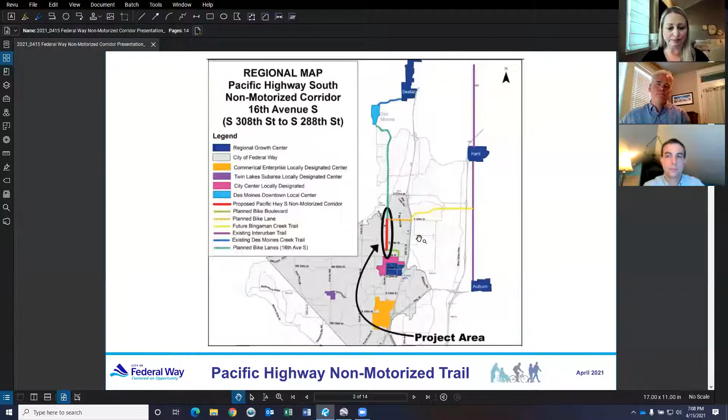All right, next slide. So this one here kind of shows the overall alignment, and Sean's going to get into this in more detail, but you can see here it starts at South 308th Street near the Federal Way High School, and then it will continue up to South 288th.

One of the questions that I always hear is, this isn't on Pac Highway, why are you calling it the Pac Highway non-motorized trail? This project is the #1 project in the city's bike and ped plan and has been for a long time. And it's always been the plan to have this parallel route in order to get bicyclists and pedestrians away from Pac Highway.

That road has some of the highest traffic volumes in the city, and so it doesn't necessarily have a high comfort level for non-motorized users. So this parallel route is the preferred alternative for non-motorized users.

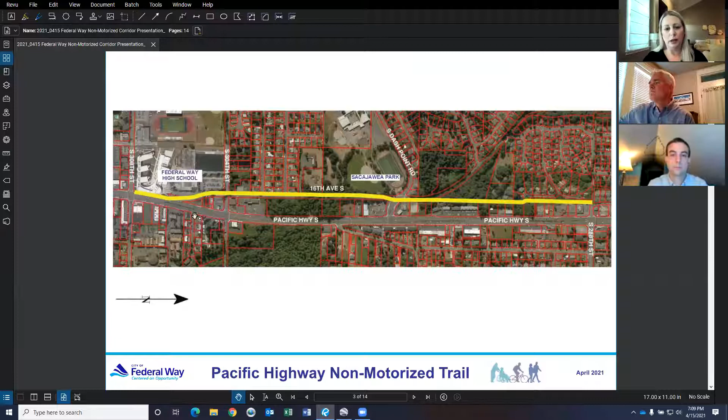Next slide, please. As far as the project budget and schedule, we normally break projects down into 3 phases: design, right-of-way, and construction. The design of the project is currently underway, has an overall budget of $700,000, a large portion of which has been funded with a federal grant.

We've been working on the design since last year and anticipate that we'll probably keep working on that through next year for parts of it.

For right-of-way, that is anticipated to cost around $840,000. Again, we have a federal grant that funds the majority of that. Right-of-way, for us, includes both purchase of property and also temporary construction easements if we need to access part of a parcel during construction. So we will start that process of working with property owners if we need to acquire any property rights or property.

We will start that later this year, probably in the fall, and that will continue on into next year. And then for construction, that's estimated at 5.1 million, and that includes the actual construction costs as well as construction engineering and construction management services.

We did recently receive a 1.835 million federal grant for what we're calling phase 1 of the project. And then there will be a funding cycle that opens up next year for additional federal grants, and we plan to apply for grants then. It's the same process that we did where we received our design and right-of-way grants. So we feel like we have a very high probability of receiving funding for construction as well.

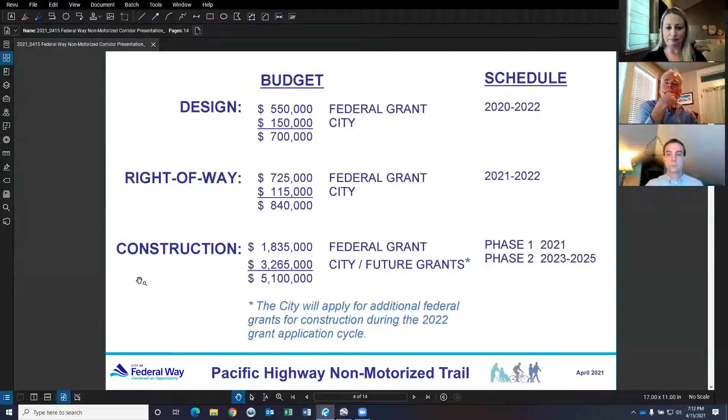Okay, so now I'm going to kick it over to Sean, and he's going to go through some of this in a little bit more specifics. Yeah, thank you, Christine. And I did want to pile on to the funding part, where there is this federal funding in there, and it kind of hems the design team and the city in what they can do with the money and what sort of betterments they can and can't do. So that really is one of the main guiding factors in the design here.

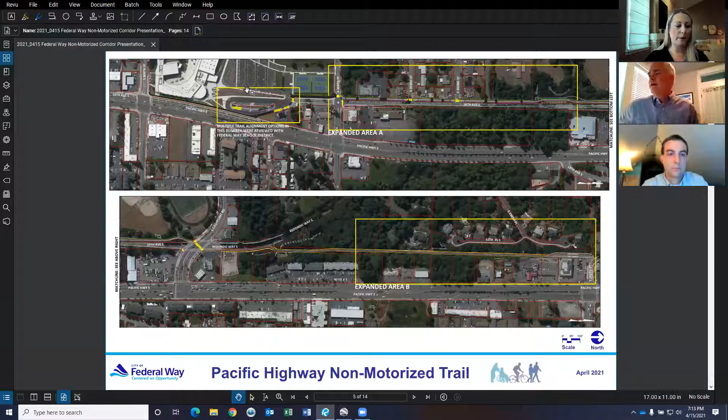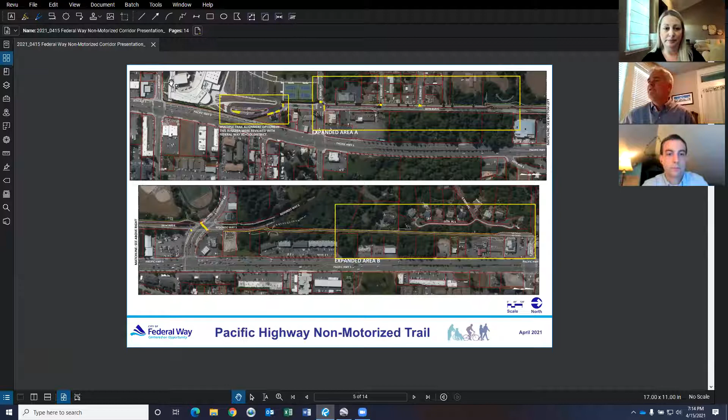Sure. So here we have a little more zoomed in, and I can zoom in and out of this throughout the presentation so you can see it better. This is essentially the entire route. It's broken into an upper view and a lower view, with a match line over here. So this line right here connects over to this line. We just did that so it all fits on one page. And then I have a couple other slides that will be more zoomed in onto these areas. But I just wanted to at least walk through using this.

You can see we're starting down here on 308th, just at the corner of the high school. There's already a sidewalk out there, and we're going to be widening that to the standard trail width. And I should back up. So what we're doing is putting in a non-motorized trail, and a typical trail width is 10 to 12 feet wide, and they usually have a shy distance on either side, like a shoulder, like a 2-foot wide shoulder or a landscaping strip or something like that.

And it's, for the most part, going to be asphalt pavement. Where it's next to an existing concrete sidewalk, for instance, next to the high school here, that's concrete sidewalk, not asphalt. So when we widen that concrete sidewalk, we're going to widen it with concrete. You can imagine it would look a little silly if it was asphalt right next to the existing concrete sidewalk. So anyways, there's this sidewalk already next to the high school. It runs along Pac Highway, and we're going to be widening that. There's some light poles out here that will have to get adjusted because they're going to be in the way of the new widened trail.

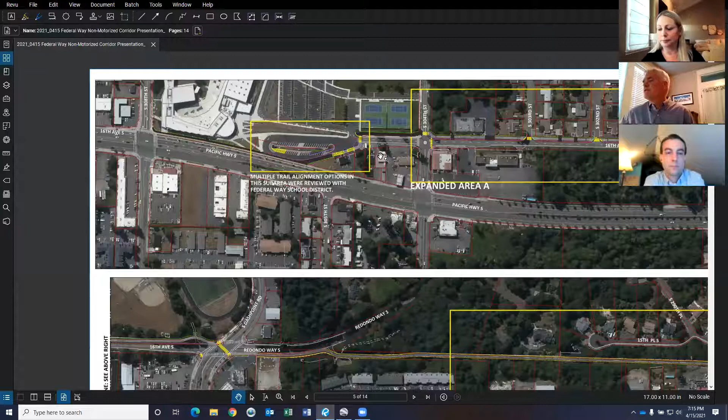As we cross, there were some different options we looked at for how to cross over from here over to 16th. I'll get into a slide that shows a little more about that. But there's this parking lot area, and we're going through next to a Jiffy Lube down here and some other commercial retail properties. Hopefully you can see it crosses 16th here. And then we stay on this side, the west side of 16th, all the way down to Dash Point.

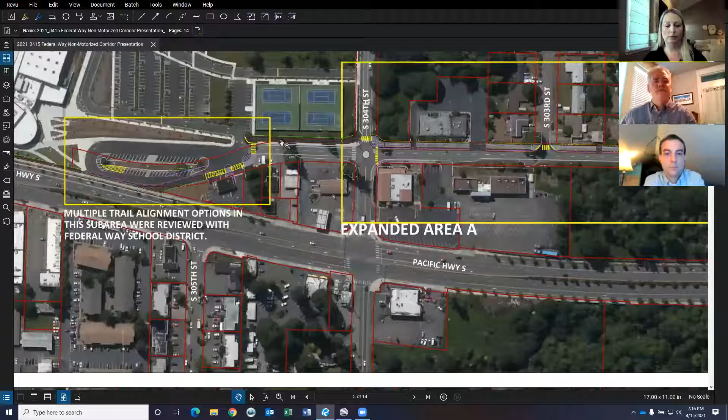Same situation here that we just talked about. There's a sidewalk out there right now. We're going to be glomming onto that sidewalk and widening it to 10-foot width. Right now, that sidewalk is 5 or 6 feet wide. We're going to be crossing 304th, and this trail is going to follow essentially the edge of the public right-of-way. It's going to go right up next to all these. There's some fencing out here along these properties, and the trail is going to go right up to that.

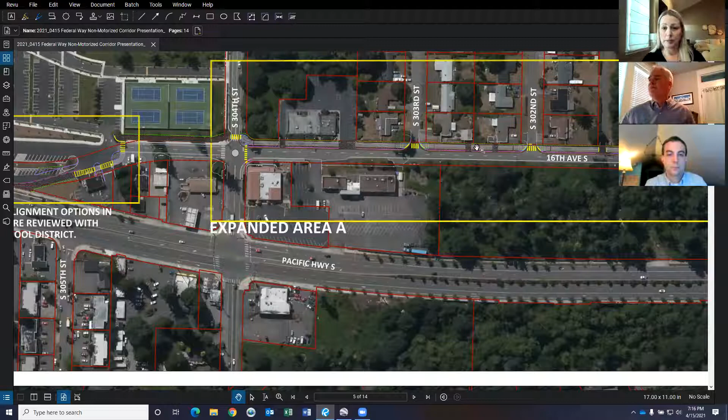And there, we have some typical sections I'll show you, but it's not like the asphalt of this trail is going to go right up to that fence.

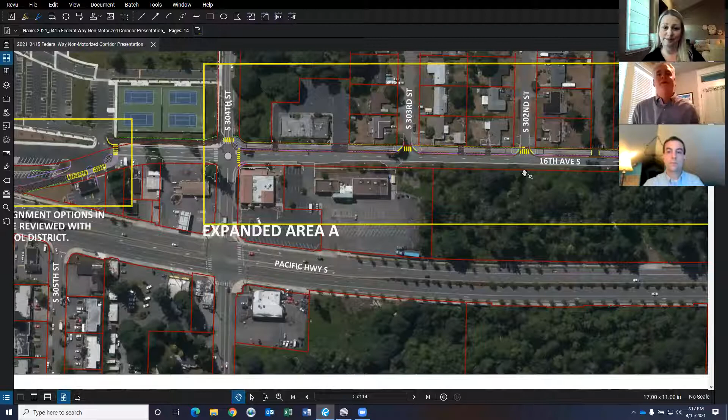There's a 4-foot landscape buffer between the private property fence and the trail. Where you cross streets, there are treatments that you put onto these. Typically, we'll put a bollard so that cars don't drive up onto this trail because it's wide, 10 feet wide, and a car could easily accidentally or purposefully go up into that trail. We do have the ADA warning strips where we cross streets.

Now we're a little further north, and this over here is Sacagawea Park. There's some on-street parking there today, and we're going to maintain that, so that's why you see this little bulb out for the trail here.

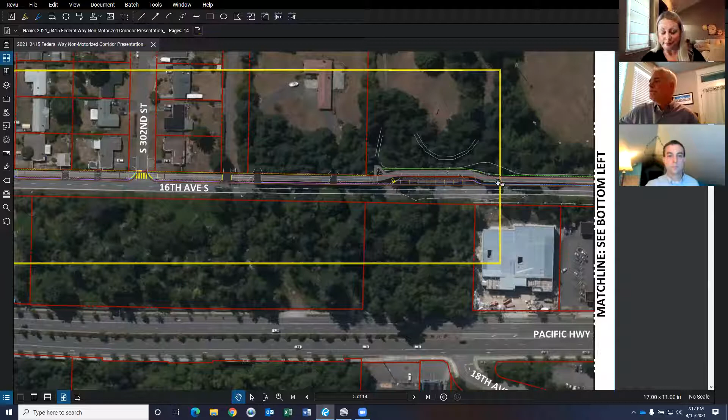Continuing to follow 16th, we're right next to Sacagawea Park. We bulb out right here. There's a lot of utility infrastructure here we're trying to save, plus it gives kind of a nice urban landscaping appeal there. Aaron will get into that more.

Right here you can see where the crossing is going to be a diagonal crossing, which is a little unique. The design team had to prepare a traffic study. Dash Point Road is actually SR 509, a state route, so we have to get approvals from WashDOT in order to do something like this. We had to go through a traffic study and show that this isn't going to make an already very congested intersection worse.

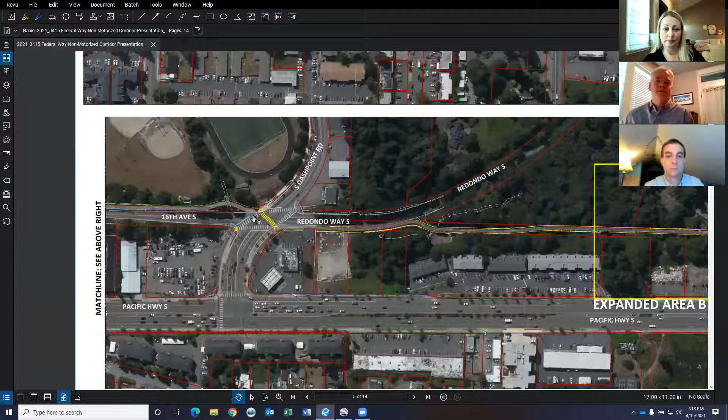In fact, it makes it a little better because fewer people are using these long crossings, more people are using this short crossing, which can speed up the cycle time. It's actually safer too because there's more sight distance for cars turning left and right.

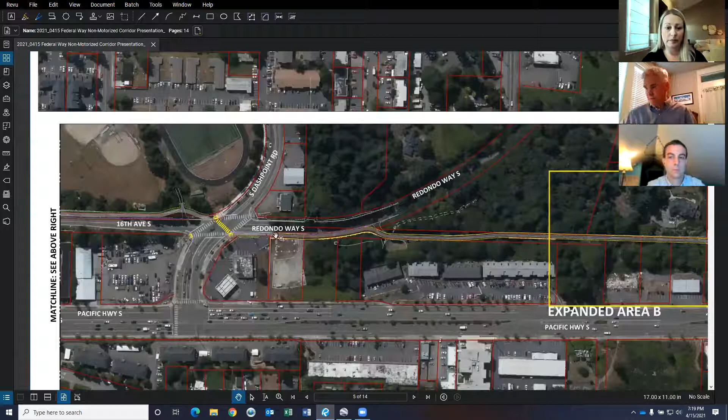This is, I think, a Shell gas station right here. The trail is running along Redondo Way at this point, and it's going to just follow the profile of Redondo Way. That roadway has a steep grade going downhill, and the trail is going to follow that.

Starting right about here, you can see it branches away from Redondo Way. There's actually a utility maintenance access spot here. You can't see it with the line work on, but if it was turned off, you'd see a swath of trees missing through this entire area for this utility maintenance path. There are a lot of utilities back here—Lakehaven Water, sewer, telecoms, fiber optics, Puget Sound Energy gas lines, power lines. We're trying to thread the needle and minimize the impacts to those utilities as much as we can.

There will be some utility impacts, but we're really trying to minimize that. You can see right here the trail has this little slight jog, and that's because we're trying to miss some of the large transmission utility poles that are out there.

Another thing to note: for the most part, the ADA standard is that if the trail is following a roadway, adjacent to a road, the trail or sidewalk can just follow that roadway grade. But through this wooded area, we're no longer along a roadway, so the rest of this trail from Redondo Way, where it branches off, all the way to the north end, has to meet ADA requirements.

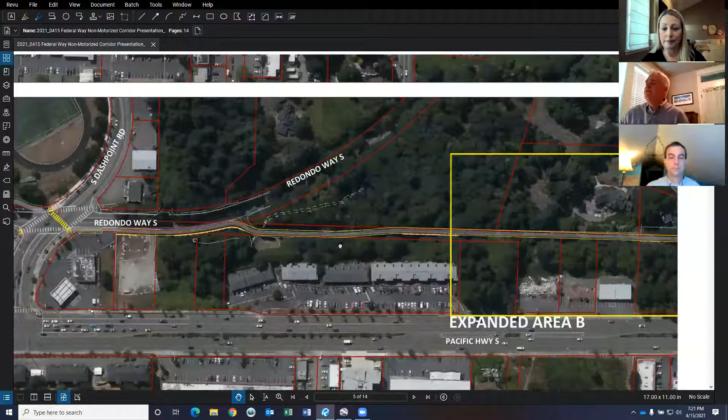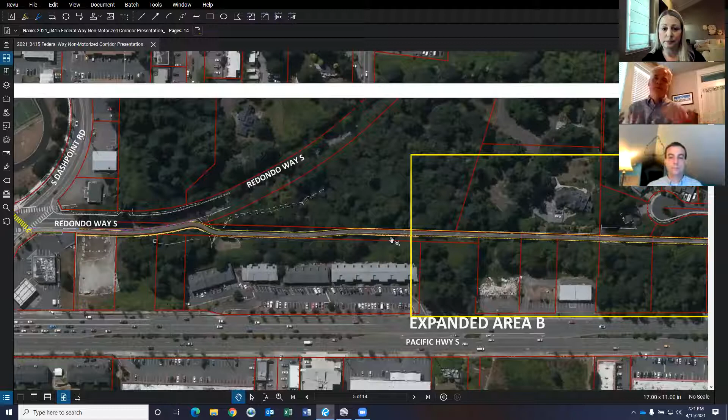For a slope, we can't go steeper than 5%. Thankfully, this whole area through here is at about a 5% slope. It maxes out over here, but there's a little bit of a retaining wall that we're going to need right here, cut into the hillside a little bit. It's likely going to be a rockery style retaining wall, about 150 feet long, just so that we can maintain the ADA grades.

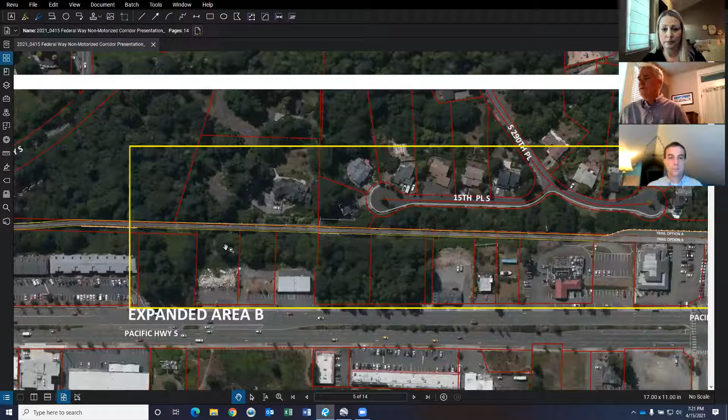We continue this way, and the path starts right here where my hand is to cut through private property. It's all private properties that have a frontage with Pacific Highway South. Right now, the way we've got it designed, we don't think we're going to need any property on this side.

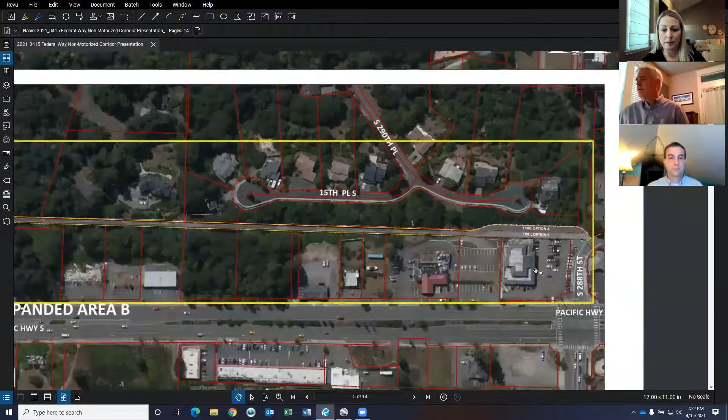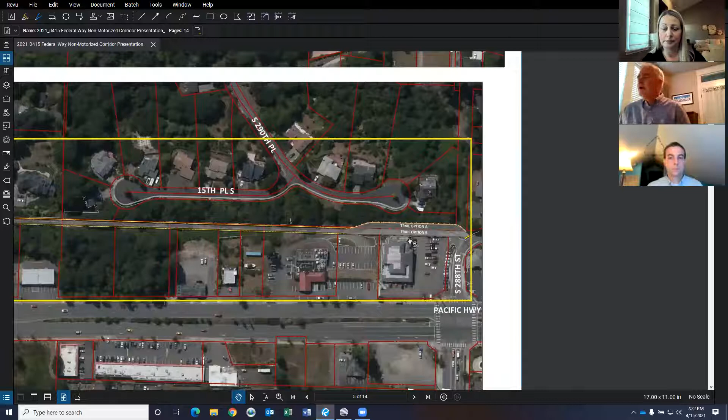And if I keep going up here, here is a commercial building. It's got some, I think there's an insurance, maybe a nail salon, there's some retail or something in there. And early on, we were looking at some options, a couple options right here, which you can kind of see, and we'll zoom into this a little bit more later.

I did want to mention that, especially through this wooded area, it's dark. So we're going to put pedestrian scale lighting through here, so it will be lit at night, and people will feel comfortable walking through here. There's also talk about potentially having some of the safe city cameras through here. The idea is we want to make this a safe destination for people to feel safe in walking through here.

Unless you think I missed something there, Christine, I'm going to go to the next slide. Yeah, no, that was very thorough.

Okay, here's one of the slides I wanted to show everybody. We're kind of zoomed in near the Federal Way High School here, and we looked at a few different options. There's this question of, okay, if we have the trail over here on Pac Highway, and the trail over here by these tennis courts, how do we get from here to there?

We looked at a few options here. One, in yellow, kind of cuts through this courtyard area and uses this sidewalk and just runs into this over here, the sidewalk over here. The school had some very legitimate concerns here because the bus is using this, putting trail users next to the bus loading zone.

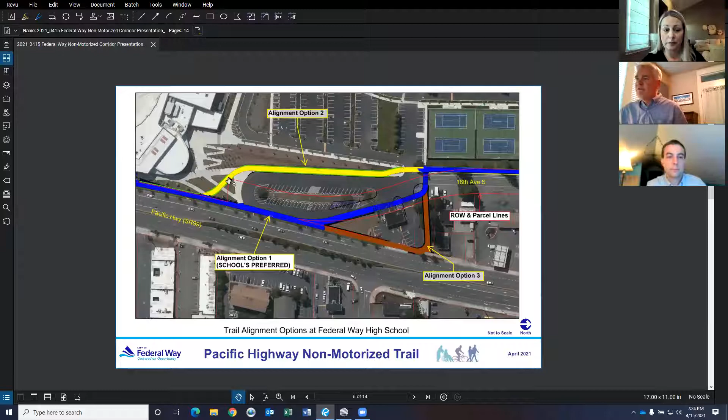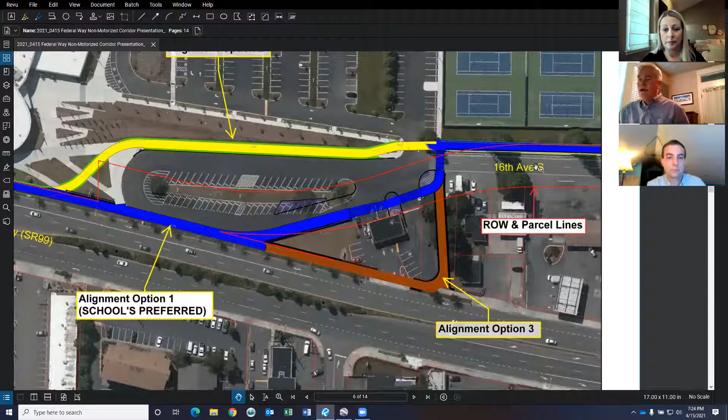I don't know if you can see it on your screen, but you can see a red line. Those two red lines there represent technically the public right of way, which I gather used to be an old alignment of 16th Avenue at some point.

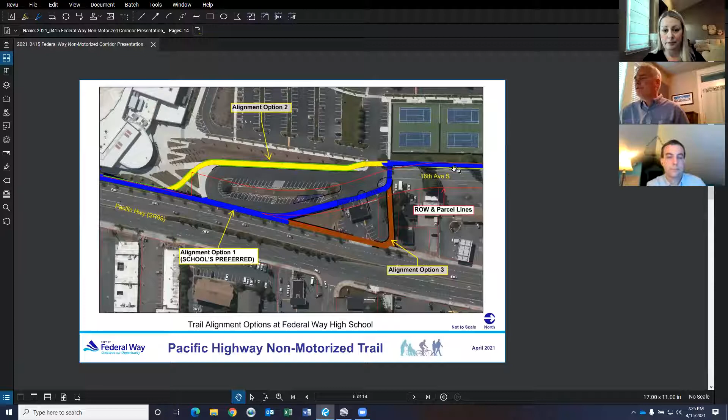And so we did hear back from the school, and their preferred option is this blue one. They had legitimate concerns about putting it up here, so we're moving ahead with this blue alignment here. Let's go to the next slide.

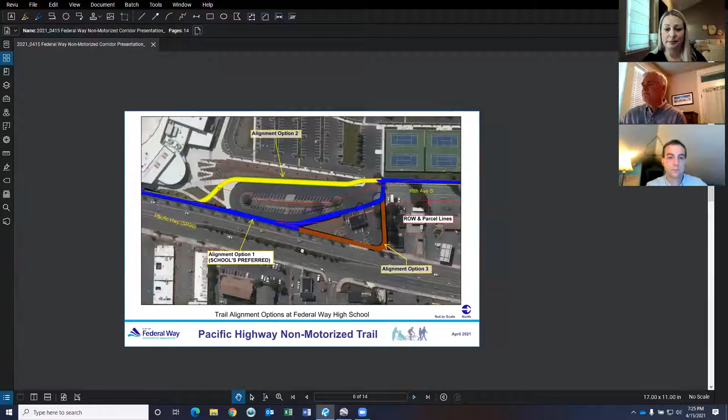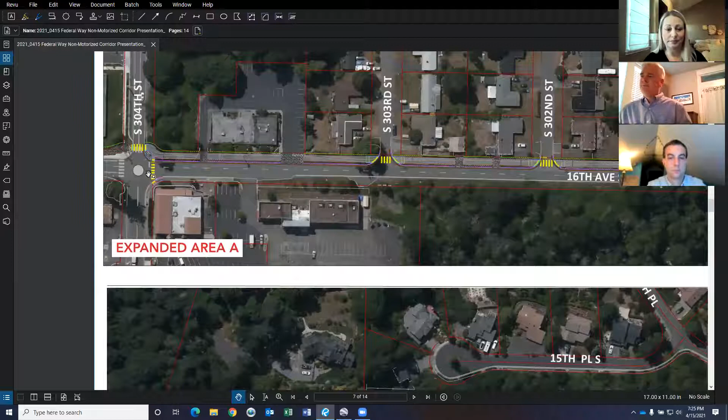Okay, now we've got a couple more of these views where I'm a little more zoomed in. You can see here at 304th there is the notion of putting a little traffic circle here to help with traffic calming. Apparently along 304th there can be quite some speedy traffic, and this could be a traffic calming measure. So we're going through and making sure that if we put a traffic circle here, the school buses that use this route can get around it okay. We're looking at all that too.

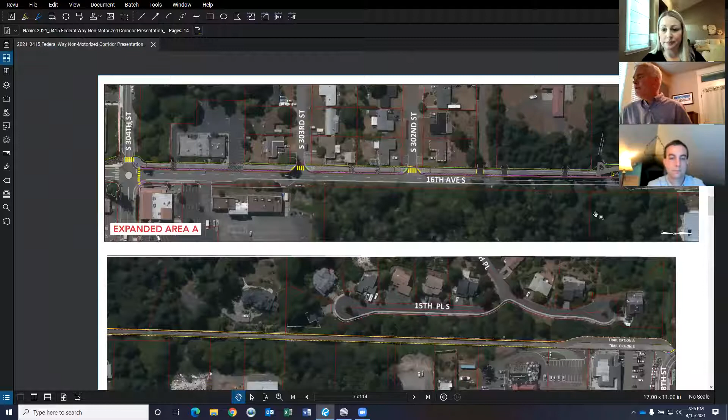So I kind of talked about this whole area. I'll zoom into here a little more. Now I'm back at the very north end at 288. We were looking at two options here, trail option A and B. Trail option A sort of swings out and goes over this really steep hillside here. This parking lot, I want to say, is 20, 30 feet above this house down here. So it's a really steep drop off.

Because of that really steep drop off, we had our geotechnical and structural engineers take a look at this and come up with some preliminary options of how you would support a trail. One option is to have a big retaining wall there, but it gets costly because that puts a lot of load on the hillside, and you have to deal with potentially lightweight fill, which gets very expensive. Another option was to treat this almost like a little bridge, with columns going into the hillside along the center of the trail, holding that up.

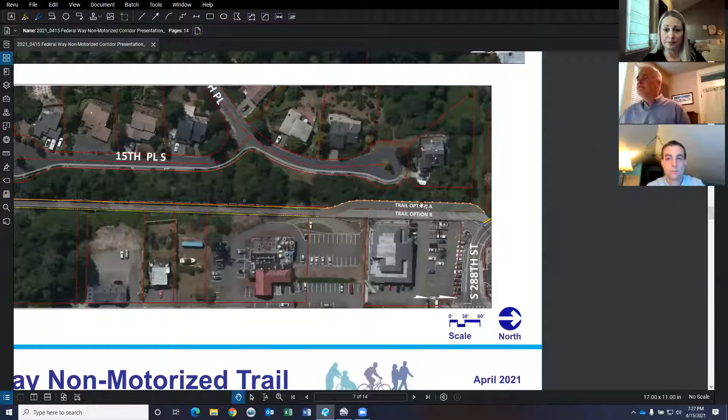And again, you can imagine the cost associated with that gets very high. So we went back to looking at, well, what if we just went along this parking lot? If we acquired this western 20 feet of this parking lot and just had the trail go along there. We're starting the conversations with this property owner and talking about what impacts that may have on their parking, their trash services, and all that kind of stuff. But right now it's looking like it's going to be far less expensive to just go with trail option B because of those structural and geotechnical issues I mentioned.

There's a ton of utilities right in this little corner that we're starting to coordinate with the various utility owners about how we're going to relocate. And of course, we're doing whatever we can—if there's solutions for us to alter a design to help those utility companies, we work through that. But sometimes there's just no other option other than moving a utility pole.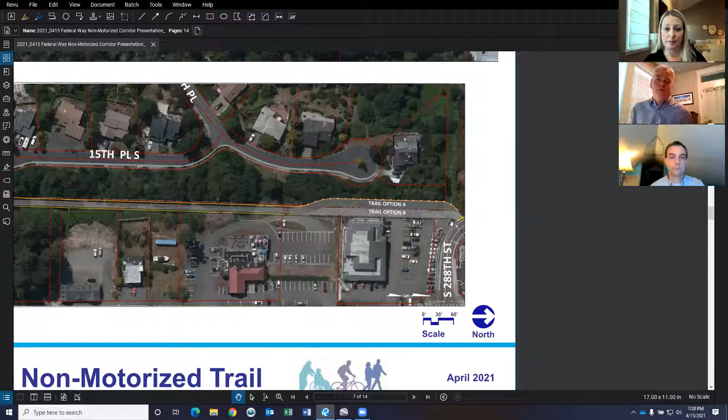All right, I'm going to go to the next slide.

Okay, so I'm going to go through some typical sections, like a cross section. And Aaron can chime in here too on some of these. What you're looking at here would be a typical cross section along 16th Avenue. We call it a south section, between 304th and Dash Point. So you have the existing—

There's typically right now a ditch out here and an existing 4-foot sidewalk that kind of meanders through this area. And then this right-of-way line that you see here essentially represents the fence line that's out there today. So the idea is we're going to stay entirely within the right-of-way and not even need a temporary construction easement over here. But you can see there's a 4-foot landscape buffer over here, a 12-foot trail, and then a landscape buffer here, which will vary 4 to 6 feet. And then here's the existing road.

And we're still trying to work through what kind of drainage impacts this will have. Typically, whenever you put this much new impervious surface down, you have to treat that water from a detention standpoint. And we have to mimic essentially a forested condition—that's the Department of Ecology requirement. So we're trying to figure out, does this become like a low swale? Are we going to have some underground drainage systems with catch basins and underground pipe to pick it all up and convey it and detain it somehow? So we're still working through that.

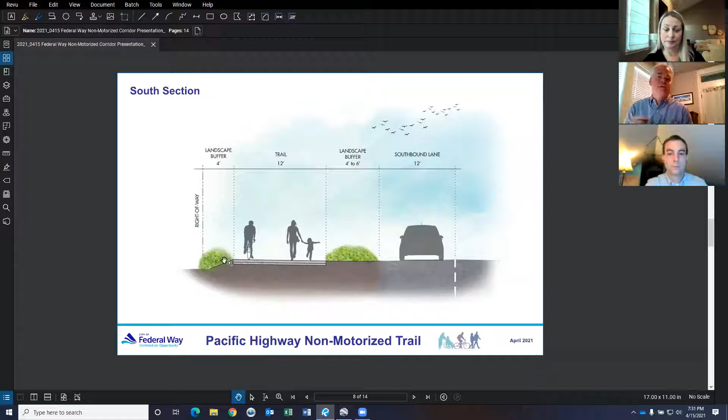Here's this area down by Dash Point. There's Sacajawea Park here. And Aaron, I'll let you chime in, but Aaron's thought about some landscape and hardscape at some spots. Yeah, thanks, Sean.

So I think this area is a real pivotal point in the whole trail corridor because it's the intersection of Dash Point Road, but it's also really at some of these gateway entrances to the park and the school there. So in order to meander the trail around some utilities, it also serves as a really good spot as a middle resting area or an area to identify the trail that goes further to the north and the south. If you were perhaps walking or riding your bike along Dash Point Road, you'd be able to identify and notice that this is a significant trail that you could connect to. So we're planning on some various amenities here to help enhance that experience as either a resting spot or a meeting spot to meet someone to go along the trail, and to enhance the experience as you might enter the park or school if you're headed that direction too.

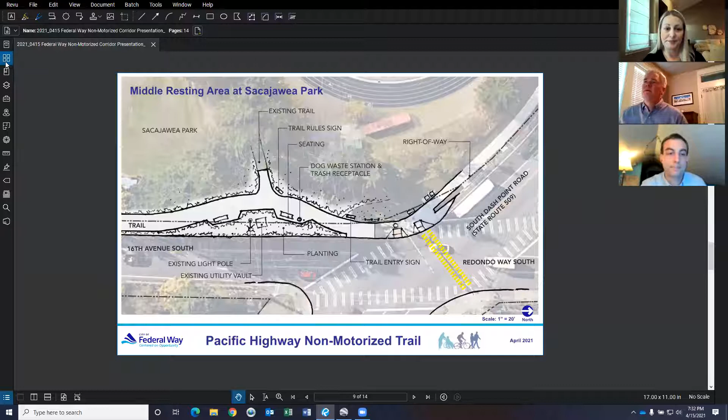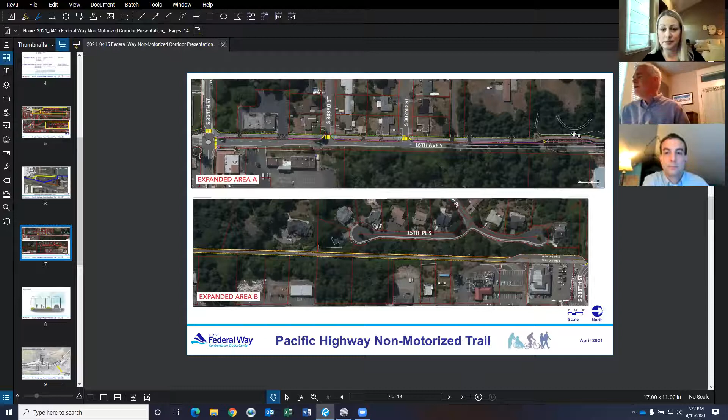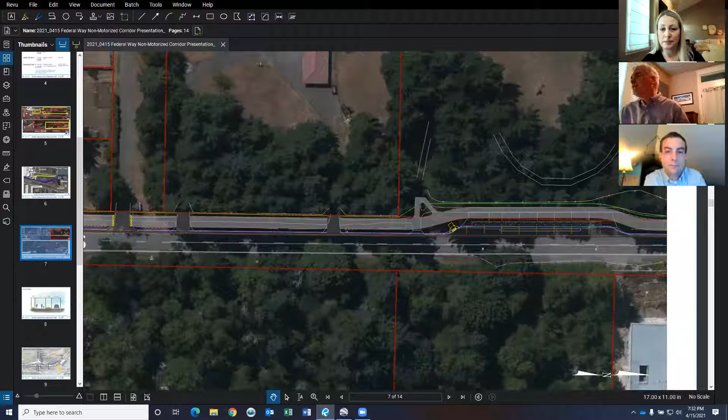Speaking of that, I forgot to mention, I'm going to go back to this slide. So there are a couple connection spots that we're having directly into Sacajawea Park. One was what we were just looking at right there at Dash Point Road. And the other one is sort of on the south side of Sacajawea Park. You can see there's going to be a nice new connection here, and it's going to connect to some trails that are already throughout this area. From what I understand, the Parks Department is thrilled about that—it's a nice, safe way to get the kids in and out of the park.

Sean, do you want to maybe explain the parking?

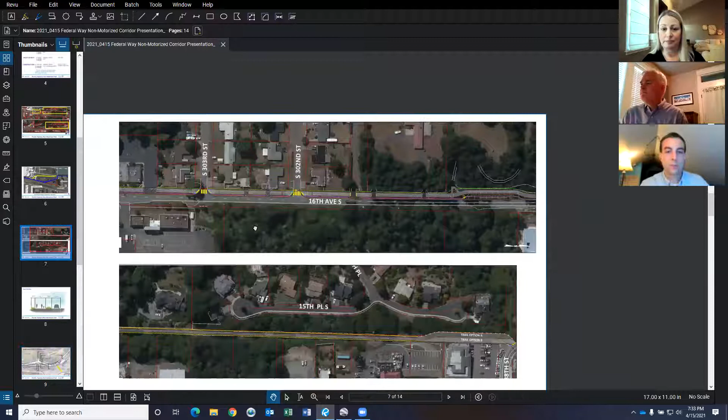How we're changing it, but not significantly. There's some parking out there. You can kind of see this light white line here—that's the existing curb line. You can see there's some stalls out there right now, and we're wanting to mimic that.

However, right now they have the option of pulling in off of the roadway totally, and there's a raised island right there, that gray line. So that raised island goes away, and it's more of a typical on-street parking where we bulb the curb out enough so you can safely park cars and get in and out of that area.

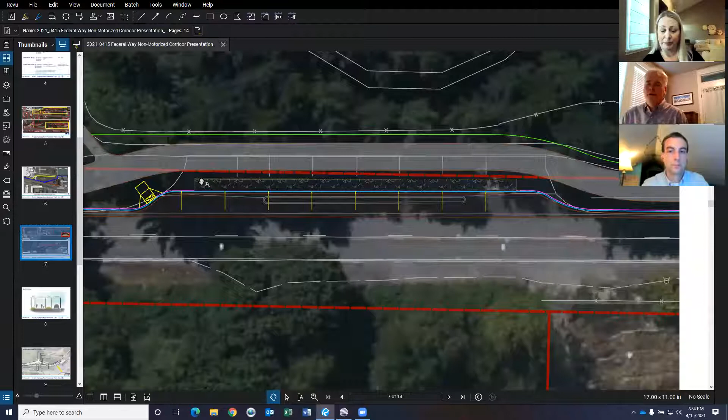Parallel parking, correct. And there'll be a little concrete patch here so that when someone on the passenger side is getting out, they're not stepping onto wet grass or anything. It's not shown in this drawing, but we'll have various connections over to the trail so people don't have to walk through mud or wet grass.

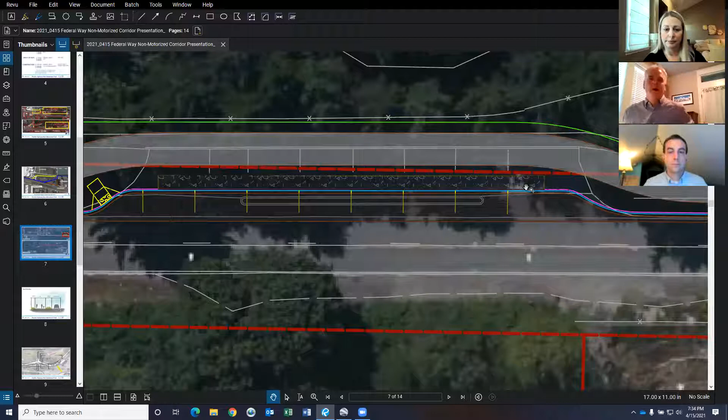All right, let me close that. So that's the section we talked about on 16th. Here's that spot near Dash Point.

Here's a typical section through the north half in that wooded area. You can see it's a 10-foot trail, with 2-foot shoulders on either side. Sometimes the hillside out there today is much steeper, and we just don't have the room to cut the hillside back at a 2-to-1 slope—that would chase it all the way back to the highway.

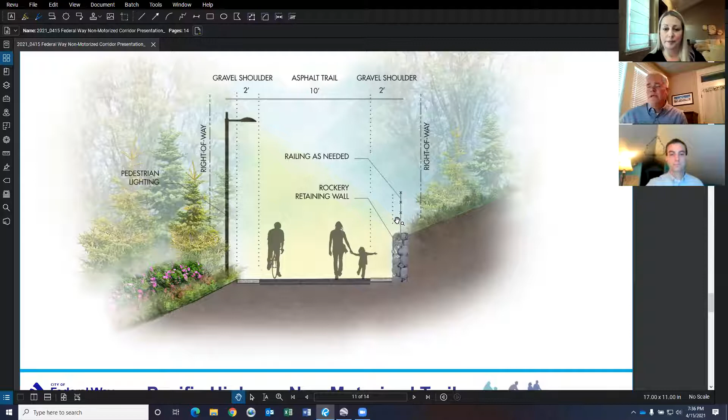So there's some locations where we have to put a bit of a retaining wall, and I have a typical section of what that would look like. The scale of this wall is anywhere from 3 to 5 feet high—it's not huge. Still, anytime you have something over 3 or 4 feet, you have to provide some fall protection in case anyone up here might fall down. So there'll be some fall protection, probably a vinyl coated chain link fence.

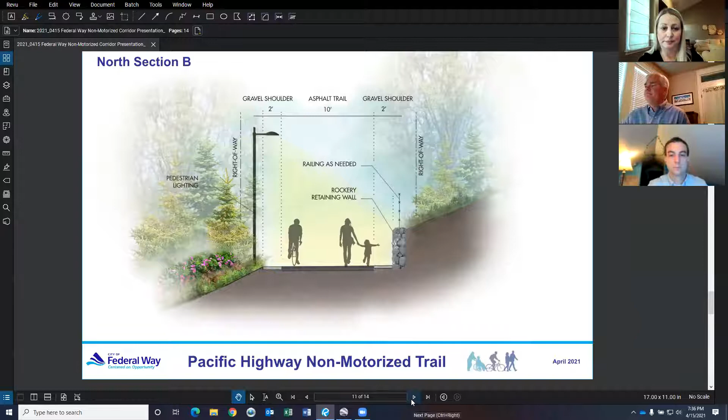And then here you can see the pedestrian scale lighting. We're still trying to figure out exactly what this light pole standard is, but there will be some lights along the trail here. I think I have another slide.

Here's a zoomed in picture at the very north end where it connects into 288. We have trail option B and trail option A, and right now we're taking the approach that trail option B is the preferred route—it's just more feasible from a cost standpoint.

You can see these black lines with the double dash are the existing right-of-way. If we went with option A, that's private property there, and that would have to be purchased. But we're thinking trail option B would stay totally within this existing right-of-way here. We're still looking at title reports of the various properties we're going through to figure out the exact property line, and there is apparently a 20-foot wide existing utility easement there at the very least.

So we're working through that. And Aaron, I don't know if you wanted to mention anything from a landscaping standpoint.

This is a terminus, and because of the grade change from Pacific Highway, we really wanted to enhance the entry into the trail at this point, so it would be visible from different vantage points, and provide potential areas for meeting someone if you're going to jog, walk, or bike with someone along this trail—with some seating, potential signage, and other amenities to really enhance that terminus or entry point, as if you went south.

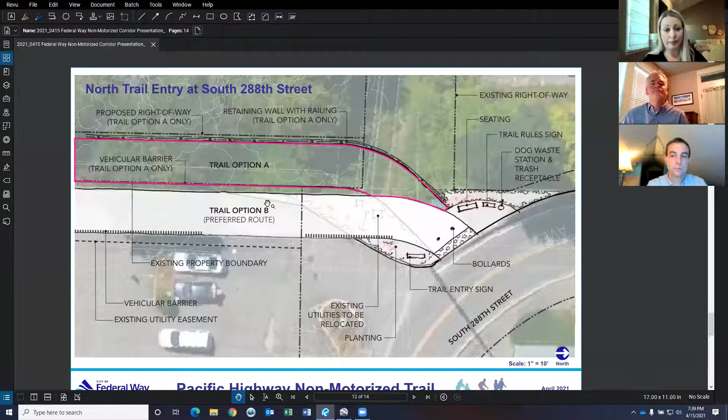I think I actually have a typical section of that. Yep, so that's right here. We were looking at trail option A where it went outside onto this steep slope, and this diagram is a little deceiving in that the slope is probably realistically more like this, or steeper.

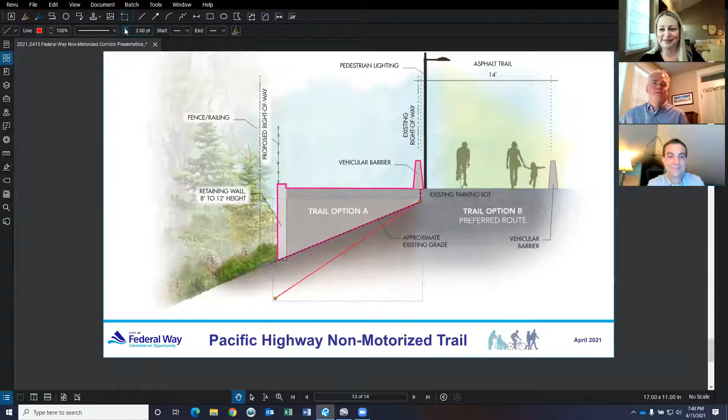So again, the plan is trail option B where it's up on this existing parking lot. The barrier, if we were to build a new wall, let me draw that and see how good my drawing skills are, but you can see the right-of-way line right there.

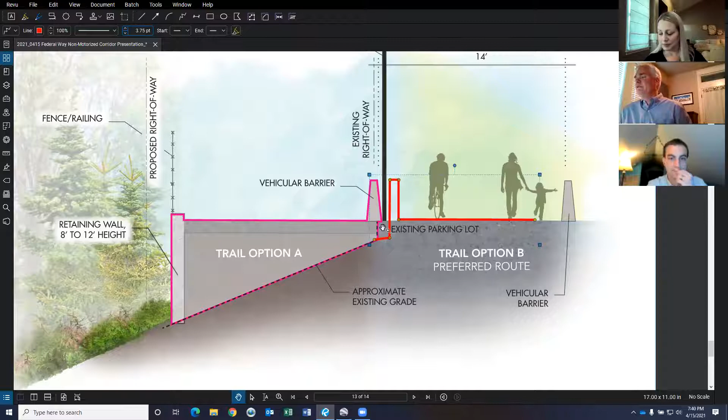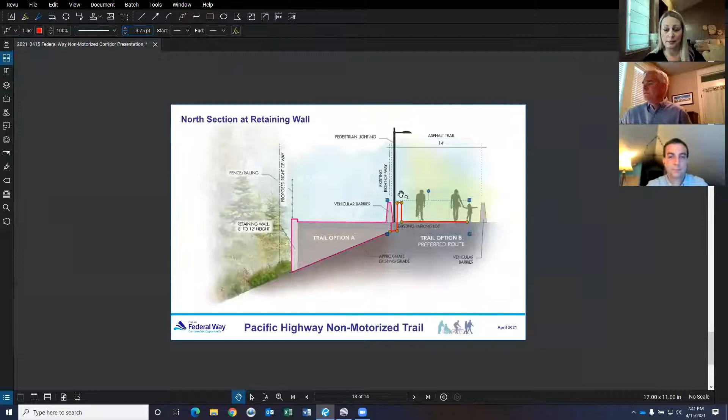The plan would be 2 feet flat, a 2-foot bench, then this barrier coming up like this, and then back down, and it would look like that. Hopefully you can see what I drew there. Again, the idea is all this work and construction is wholly within this side of the right-of-way line. Okay, that crude drawing is forever recorded.

So Christine, I think that's essentially the last of the slides. Is there anything you think I missed or should elaborate on from the other slides?

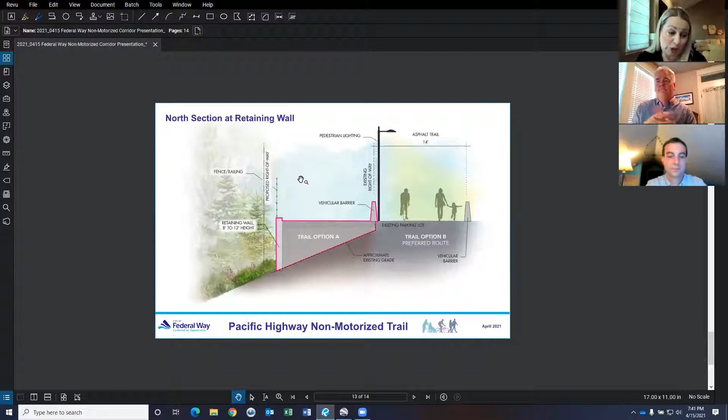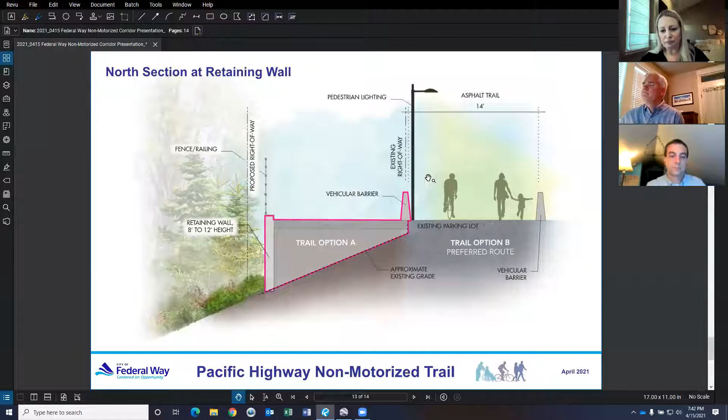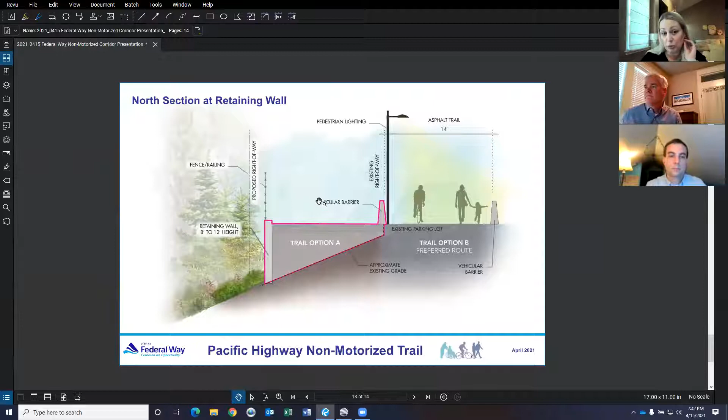No, I think that was a pretty good overview of the project. I want to say, for those who joined us tonight who also attended our earlier meetings, those were neighborhood meetings with properties located within 300 feet of the trail. We did take some of the feedback we received, because our trail option A was more of our preferred option at that time. So we did evaluate that some more, like Sean mentioned, and it wasn't entirely a cost-based decision, but cost did play into it a lot once we saw what the structures on that steep slope would cost. And also, one of the other concerns we heard previously that we've tried to continue focusing on was a concern for safety along the trail.

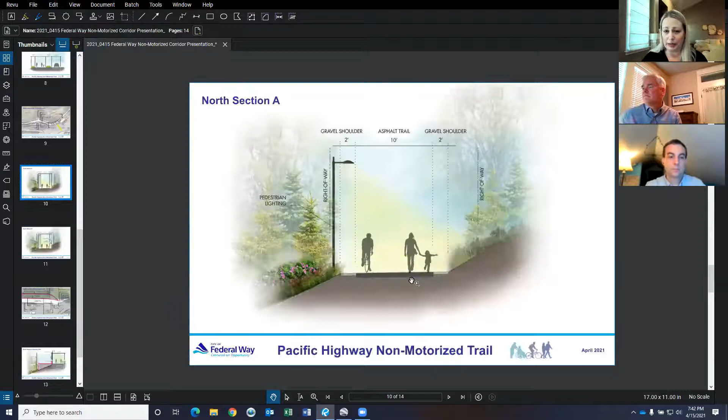Aaron, do you want to talk a little bit about that? Yeah, those have been very valid concerns that we've taken to heart as a design team and working with the city on.

As Sean mentioned, there are several elements we're doing to help increase use of the trail that will bring positive uses to the spaces already there. And the lighting will further enhance and encourage use of it at lots of different times of day, not just during daylight hours.

And making sure there are nice open sight lines, avoiding really tall plants that could create hiding spots, and keeping that trail width, that typical section width, nice and open really helps visibility as you view to the east or west, but even more so as you look north and south. The work Sean's team is doing to regrade that slope so it's 5% or less will really help you be able to look down or up the trail the whole way and see anyone coming, a friendly face, and feel comfortable and safe using the trail at different times of day.

And then the amenities we're going to provide at some of these resting areas will really encourage use of the trail as an alternative to Pacific Highway sidewalks and the busyness and noise that area brings. This will be a really enjoyable trail to use, and we're excited to see it come to fruition, and to really contribute to the safety and multi-use of the spaces back there, in the north section, but further to the south as well.

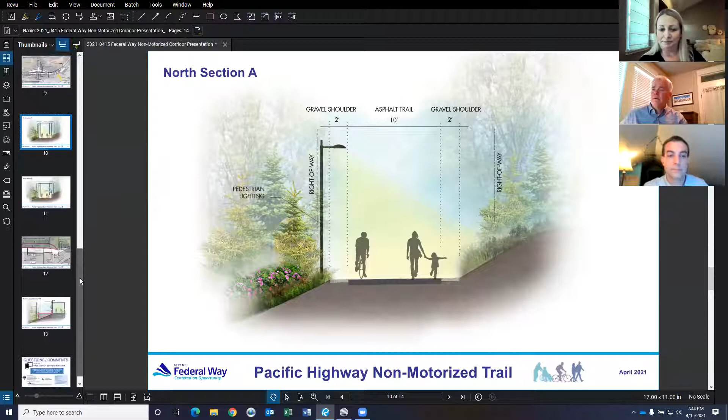As I mentioned at the beginning of the presentation, I see that we've had a couple additional people join who might not have heard that originally, so I'll go through that again.

We have a 2-week comment period where we're asking people to submit any questions or comments on the project. That would be until April 29th, 2 weeks from today. The city will then take your questions and comments and prepare a consolidated response, which we will post on the project webpage by May 7th.